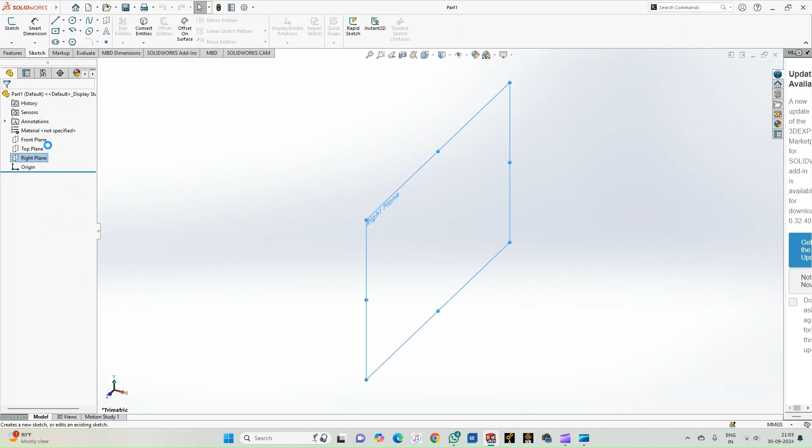Now let us proceed towards creating the sketch of the part that we require. So let us select the right plane and go for the sketch option on the right plane. Now we are in the sketch mode, and you can see that the toolbar relating to the sketch is activated.

Since the outer cage is composed of a circular tube-like structure or a hollow tube, we can create the part by making two concentric circles. Ensure that the unit is in mmgs, and let us create two concentric circles by keeping the center of the circles at the origin.

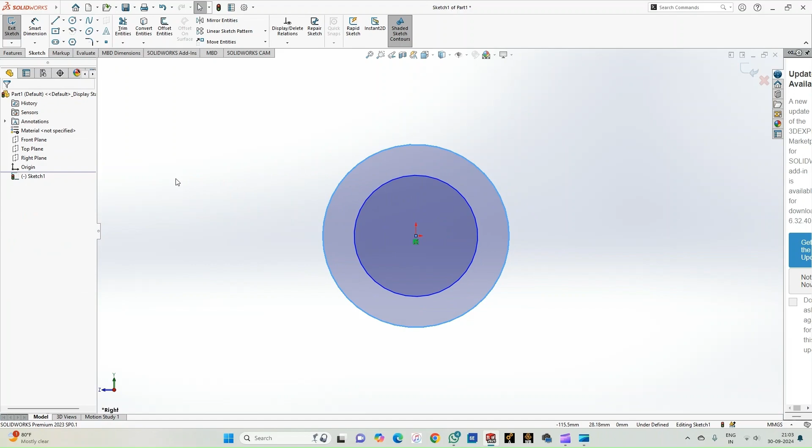Use the escape key to come out of the circle option. Now let us go for smart dimensioning this circle. Let us tell that the outer diameter of the circle is 52 mm, followed by the inner diameter, which is equal to 41.75 mm. So this is the first part of the sketch wherein we have created two concentric circles.

So now we'll just move out of the concentric circle option, and then we'll exit the sketch mode.

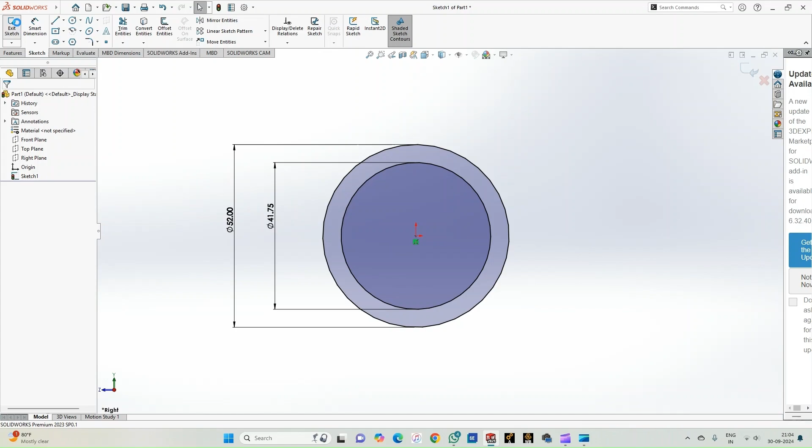Now we'll go to the features and we will select the extruded boss or the base option. You can see that it is by default selecting the profile and showing the extrusion in this direction.

However, we will change the direction from blind to mid plane, and let us ensure that it has a thickness of 15 mm. You can see that from the mid plane it is creating a protrusion in both directions in a symmetric manner.

That is 7.5 mm here and 7.5 mm here, so the total width or thickness here is equal to 15 mm.

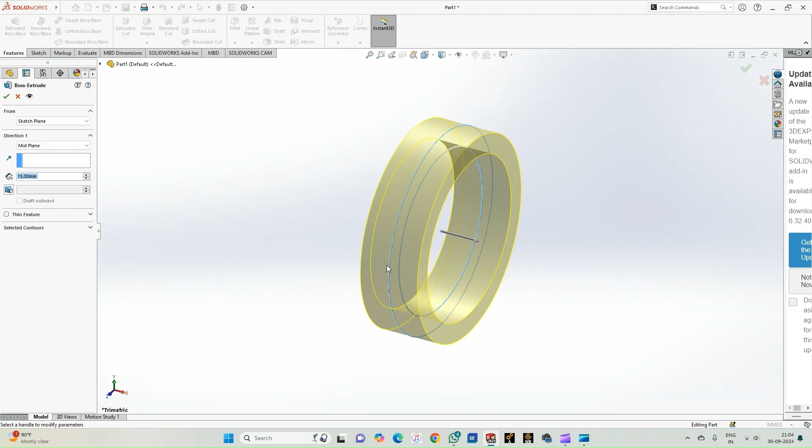So now just click OK, and now you can just see that the part is ready.

So now let us go for assigning the material for this. Just click on material, select the material, and then right click on this to get the edit material option. We will assign the material as steel of type AISI 304, and now click apply and click close.

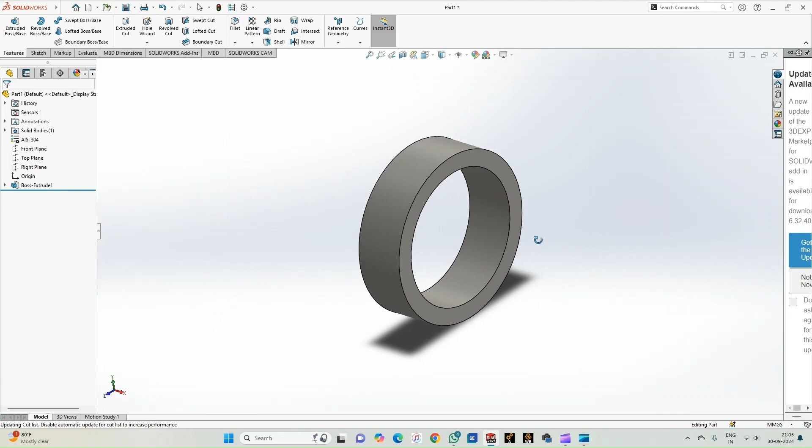So now you can just see that the appearance of the part has been changed. This tells that the material has been added.

So now let us go for creating a cage or a revolved cut inside this profile so that it will be useful for housing the balls which are a part of the ball bearing.

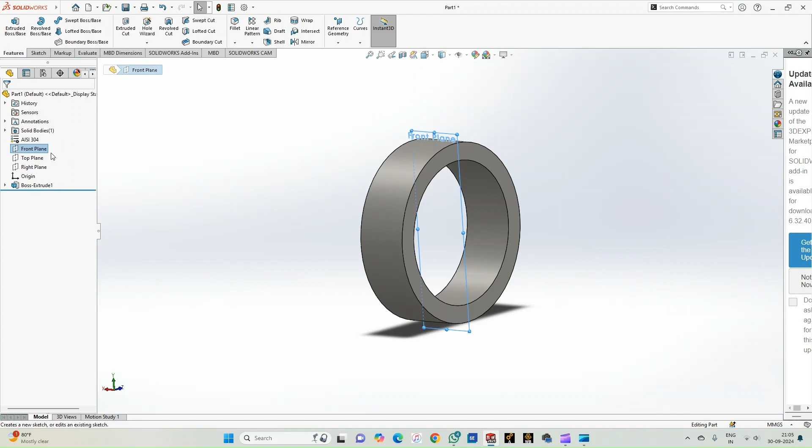So now we'll go for creating the sketch. Before we move on to that, let us select the front plane option and then go for the sketch window on the front plane. So now we'll be getting this profile.

But however, we require a reference line, and to select the reference line, what we can do is change the display style from shaded with edges to hidden lines or the wireframe model. So we'll select the wireframe model.

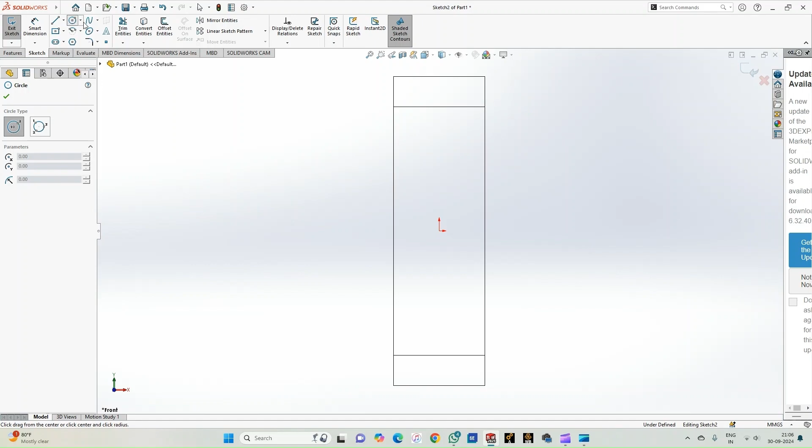So now we are going to select the circle option, and now let us simply create a circle of any arbitrary radius. Come out of the circle option by using the escape key.

So now just take your cursor and click on the center of the circle and also the origin point, and ensure that they're made vertical. So the first constraint is defined.

Click OK. So now you can just see that the circle is moving only in this direction, and the movement in the x direction is arrested.

So now what we can do is we'll go for defining the diameter of this circle. Let us tell that the diameter of the circle is around 10.5 mm. So this is the diameter of the circle.

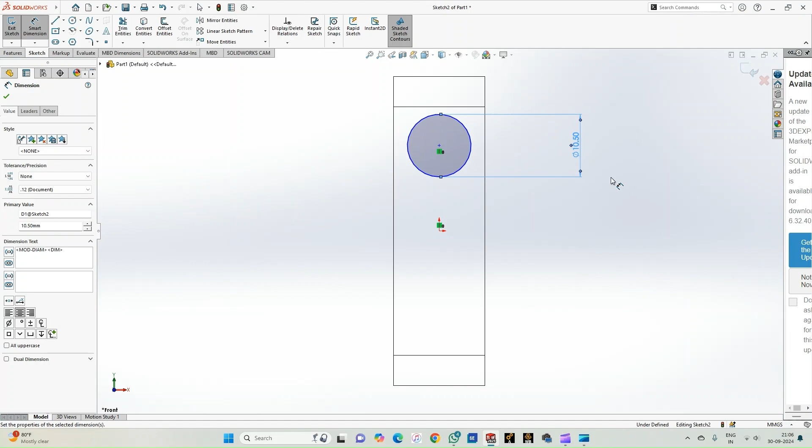But however, still the movement in the y direction is not yet arrested. So for that, what we need to do is go for smart dimension again, select the circle option, and select this reference edge.

So now you can see that the constraint is arrested and the movement is arrested, and that is why you will be getting fully defined here. So now we'll just change this dimension to 7.05 mm.

However, you can see that we require a distance between the outermost part of the circle, that is this arc, and this line. So we'll click OK and select the dimension again. We'll come to the leader option, and here there is a condition called arc condition. Let me select minimum here, so it is showing the distance from this part of the circle to this line. If I go for maximum, it is going to consider the distance from this part of the circle to the line here. So we will select the minimum distance.

Now double click on this dimension and enter this distance as 1.875 mm. Click OK. So it is rounded off to 1.88 because in the precision we have given the decimal place up to two places, so it is rounding off 1.875 as 1.88. Now click OK.

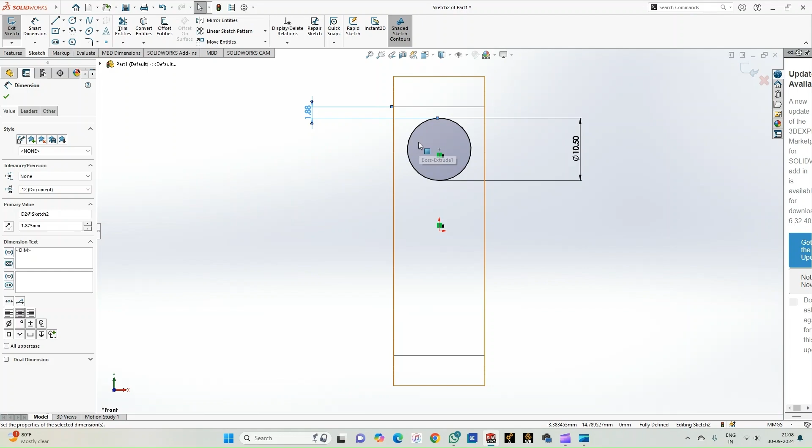You'll get this minimum arc condition only when you select the circle and the line. Let me undo this and select the smart dimension again. If I'm selecting the center point and this line option, it is only defining the distance of the center point from this line. So when I click OK and come to the leader option, I will not get this minimum arc condition. For this reason, we should select the circle profile and then this line in the dimension.

Let me click on the circle and then this line, so now it is going to consider this distance. I'll change the distance to 7.05 mm, come to the leader option, select minimum arc in the arc condition, and then change the dimension to 1.875 mm. Click OK. Now I'll ensure that it is done.

One more precaution I need to take here is, if I create here, you can see that the circle is still beneath this inner circle, so I cannot create a revoluted cutout. I want the circle to protrude or interfere into this profile of the inner diameter.

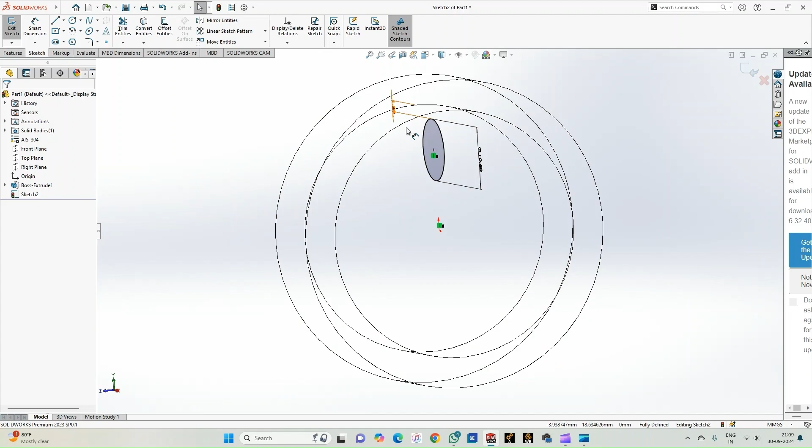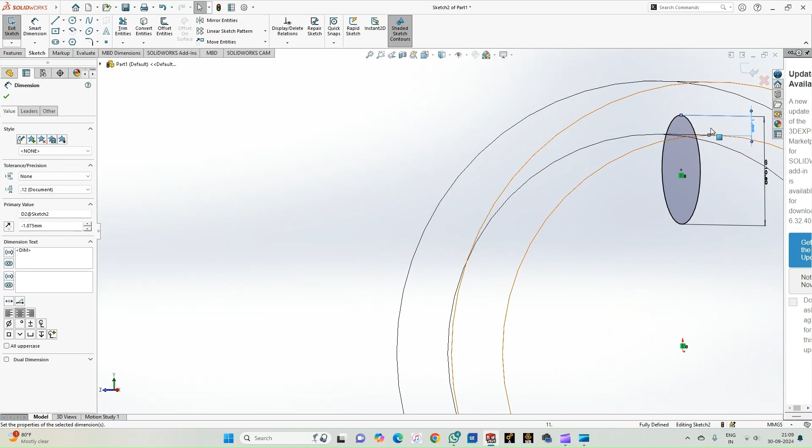So let me come to the front plane and select this dimension. Here you can see the option to reverse the sense of the dimension. The moment I reverse the sense of the dimension, you can see that the circle's minimum distance is moving towards this side, and the circle is interfering inside the inner diameter. Now I'll come back to the front view.

Now I need to cut this profile in the inner diameter. For that I require a reference line, so I'll go for the line option, select for construction, and draw the axis line of any arbitrary length from the origin. Now this completes my sketch.

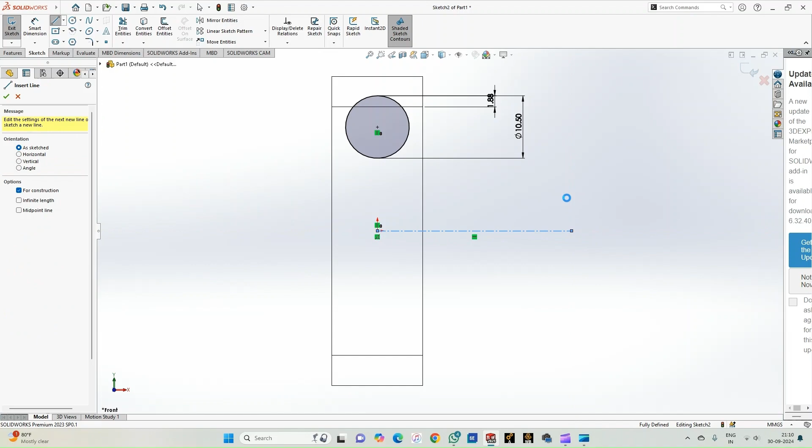I'll go for the features option and take revolved cut. By default it is showing the axis of revolution as this, and this is the profile to be used to create the revolve cut. I'll click OK, and now you can see that the revolve cut has been done.

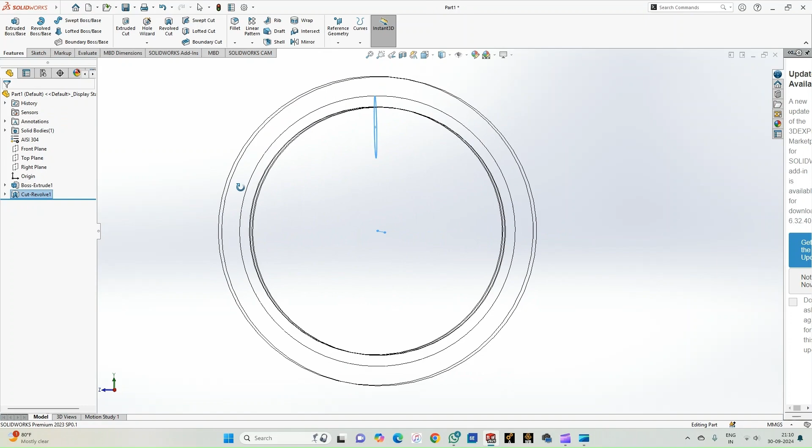Let me switch over to the solid mode from the wireframe mode. Now you can see this revolved cut that has been created inside the outer race part. This is the part where I'll be housing the rolling elements, that is the balls of the ball bearing, in the final assembly.

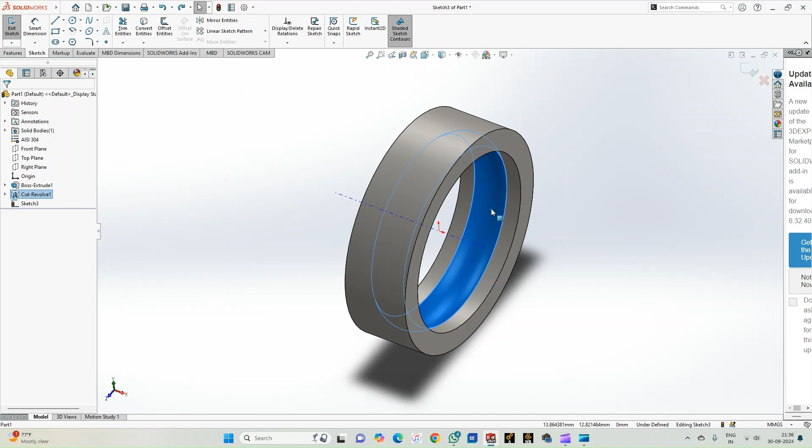Now that we have created a revolved cutout to house the rolling elements of the ball bearing, we need to create a groove on both ends, that is this surface and this surface of the outer race. The purpose of these grooves is to prevent dust particles or other foreign particles from entering the revolved cutout, so that they don't damage the surface finish of the rolling elements in contact with this inner surface.

For that purpose, we need to again select the front plane, and the sketch mode is selected, and now we can go for the normal view tool. So now we are in the sketch mode.

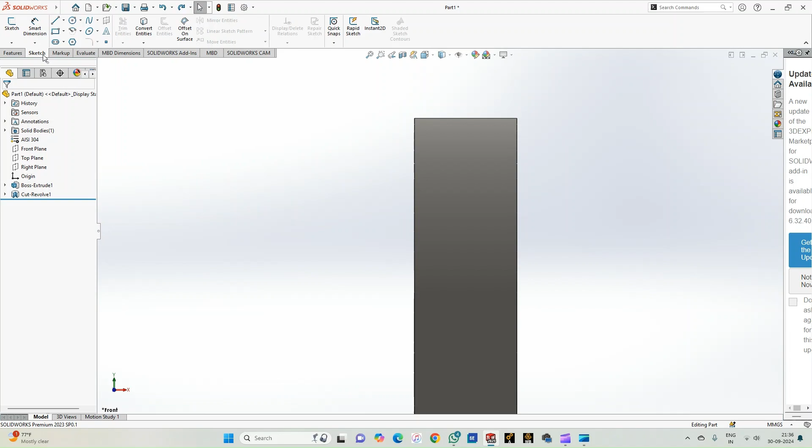So again let us switch over to the wireframe model. We need to have the grooves on this and the surface.

For that, what we can do is go to the front plane and select the sketch option. Once the plane is selected for the sketch, you get this origin symbol.

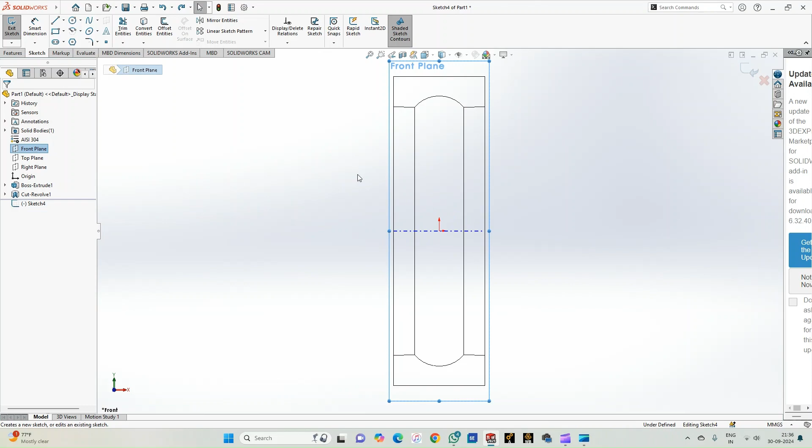Now let us select the corner rectangle option and randomly place a rectangle like this. Come out of the rectangle option by using the escape key on the keyboard.

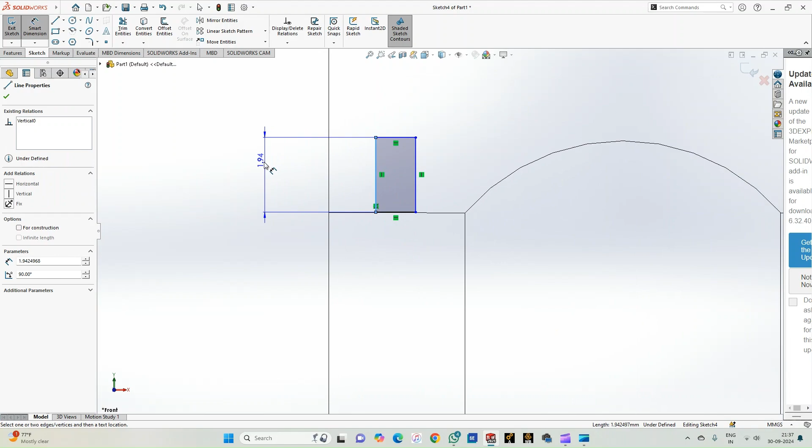Go for the smart dimension. Ensure you are in MMGS mode. Now let us assign the depth of this groove to be equal to 0.63 mm, and the length of the groove to be equal to say 1 mm.

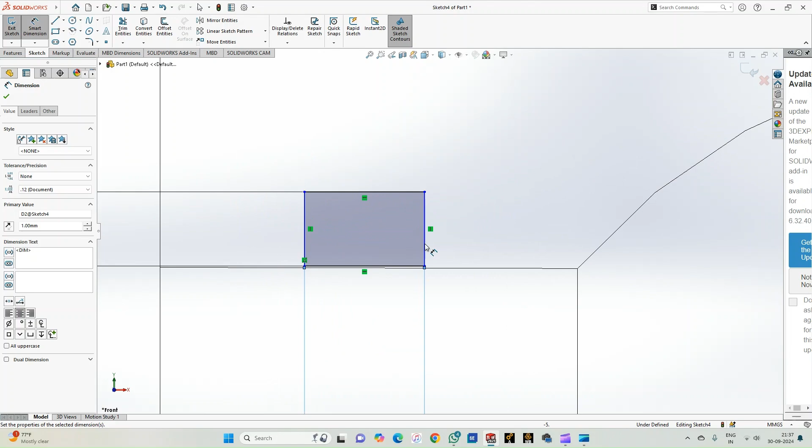But still you can see that it is not completely defined, it is still underdefined. You can see which parameter — these are the two lines. For that we need to define the distance of this from the outermost edge. Now you can see that it is fully defined, and this distance will be equal to 0.5 mm. So these are the dimensions used to create the inner groove.

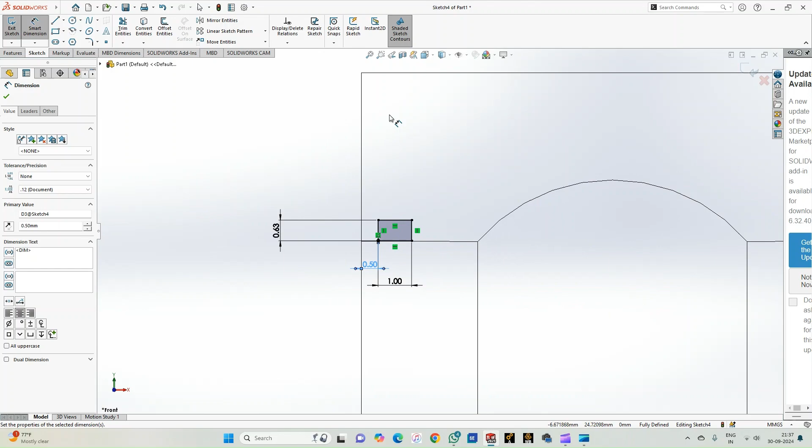This is the revolved cut that will be created, and we require this profile on this region too. For this purpose, we can go to the line option, select for construction purpose, and simply draw a vertical line like this, so that it is taking the reference for mirroring.

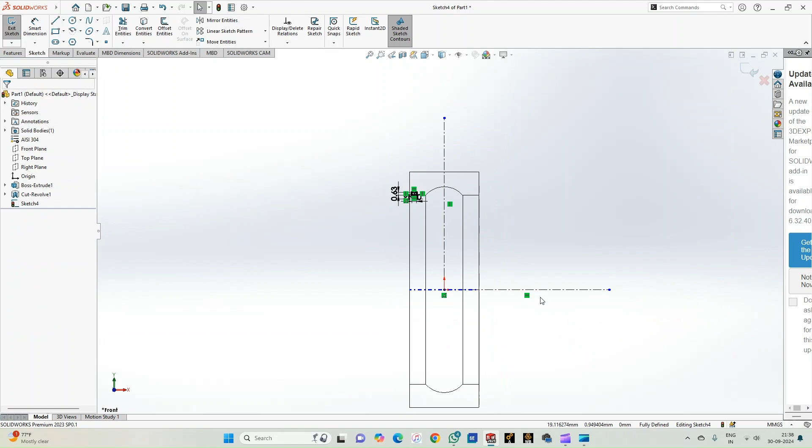We'll also draw one more line for construction from the origin, and let that be in the horizontal plane, in the x direction, and this line in the y direction. This is used for the revolved cut axis, and this axis line is used for the mirroring option.

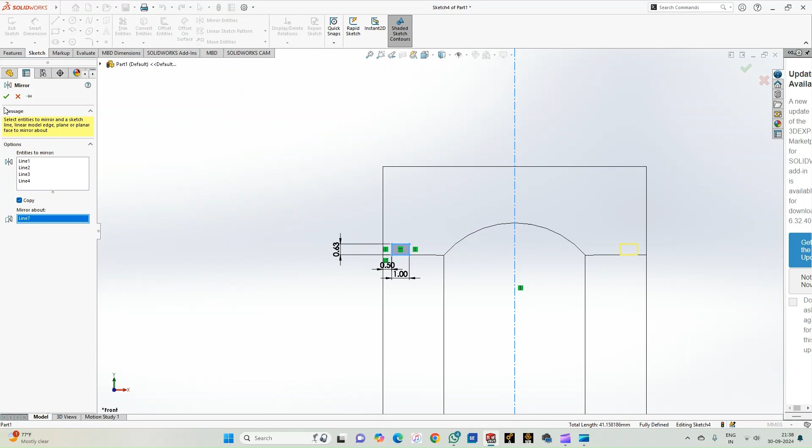Now let us go for mirror the entities. It is asking for the entities to mirror, so I'll simply select all these lines. You can see that lines 1, 2, 3, 4 are all selected for mirroring, and it is asking to mirror about an axis, so select this axis, and ensure the copy option is selected. Now click OK. You can see that the entire profile is mirrored about this particular axis line. Now we are done with the sketch part, and we shall move on to adding the features — that feature is nothing but the revolved cut.

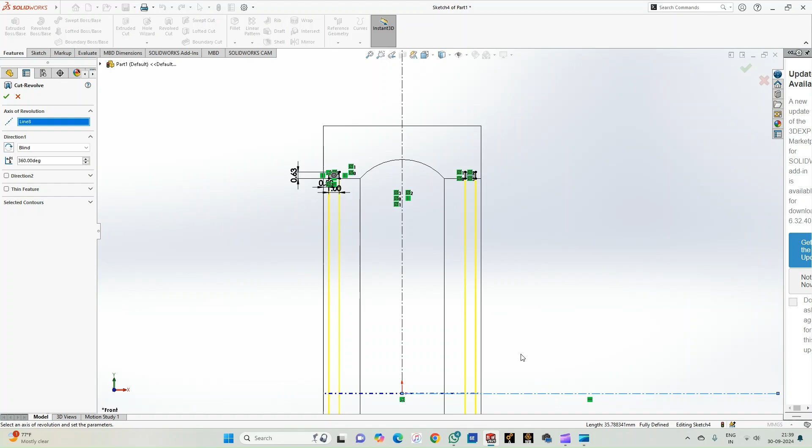Now go to the features and select the revolved cut option. It is asking for the axis of revolution, so select the axis of revolution as this line, and by default it shows in yellow color what the profile will be when a revolved cut is applied to the part. Now click OK, and you can see that the revolved cut is created.

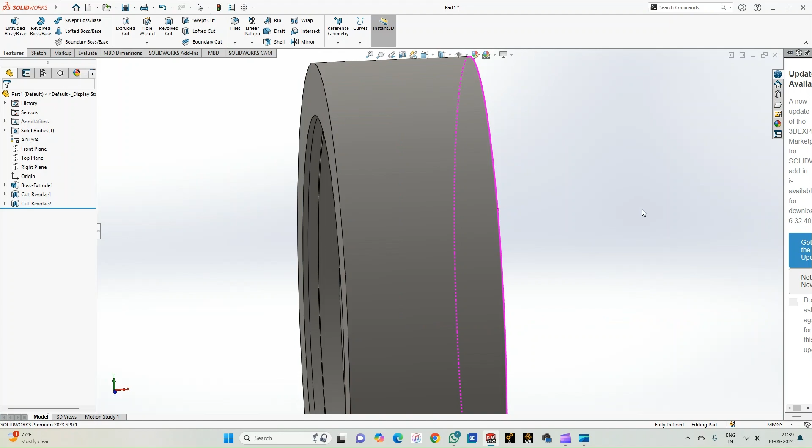So this is still in the wireframe model. Let us switch over to the solid model. Now you can see that the cutout is created. This is the cutout that is created, and this is the race.

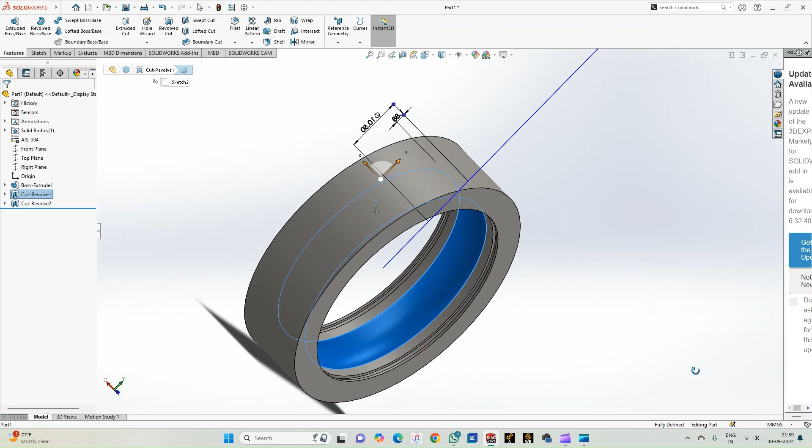This is the inner cutout of the race, where the rolling elements shall have a surface or a point contact. And here these are the grooves that are created. Correct, so this is the grooves that are created. This is the inner cutout, and this is one more groove that we have created on the either surface.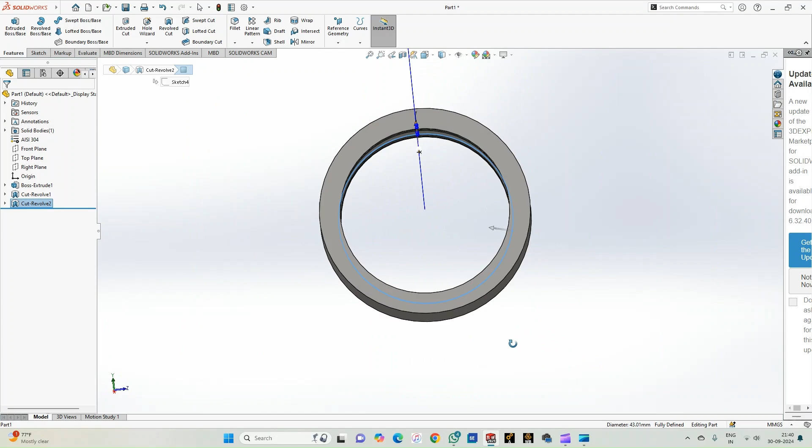This completes the creation of the outer race part. Basically it is nothing but a hollow cylindrical part which has the inner cutout — that is this part — and the two grooves on either side. So this is how we create the outer race part.

So with this we complete the creation of the part model of the outer race. We need to remember a few things here, like how to create the revolved cutout, how to use the commands of minimum arc distance, and also the moving of the circle towards the outer profile, so that it is having a revolved cutout within the material. And we have assigned the material AISI 304, which is one of the grades of steel used in the manufacturing of bearings.

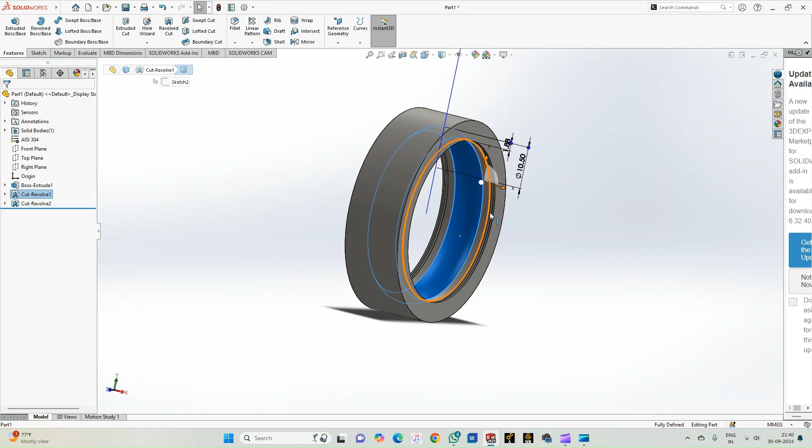So with this, we end up the video that details about the creation of the outer race part.